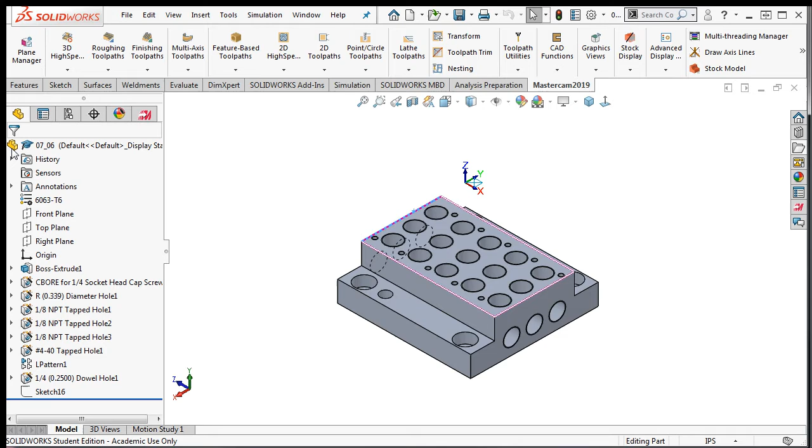Next, I'll select this edge on the top of the part. Scroll down and select propagate along tool plane and accept this selection. Because I'm using the one-pass cutting method, Mastercam will position the cutter center on the center of the face.

With the 2D toolpath facing window now open, I'll select the Tool tab. Like all toolpaths, I'll follow the same steps. So next I'll click the Select Library tool, then Filter. Because a face mill was the last tool I used, it will be the current active tool type.

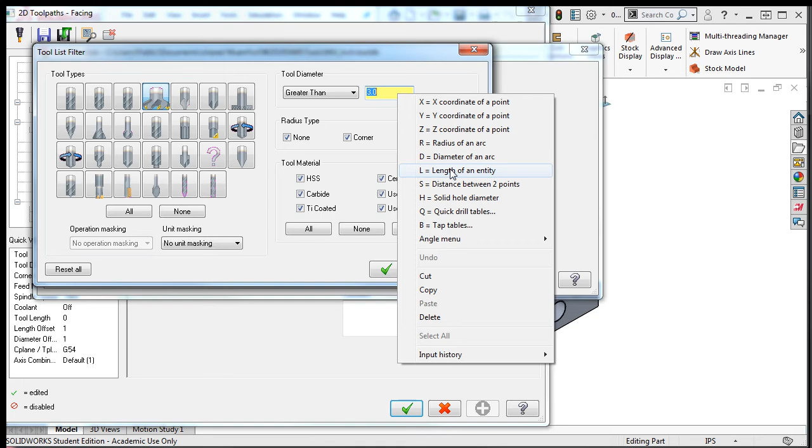However, I do not recall my part sizes, so in the tool diameter section, I'll choose the drop-down menu and select greater than. I'll right-click in the yellow field and select L equals the length of an entity. Now I'll select this bottom part edge, since the face mill must be greater in diameter than the line in order to machine this part in one pass.

And I can see that this part is 3 inches wide, so I know I'll need a face mill larger than 3 inches. I'll accept this search criteria and exit back to the search results. I can select the 4-inch cutter and accept this selection.

For this material with a carbide insert face mill, I'll set the cutting speed to 1100 feet per minute, the feed per tooth to 0.01, the plunge rate to 20 inches a minute. And then I'll add the comment in all capitals to machine the top surface.

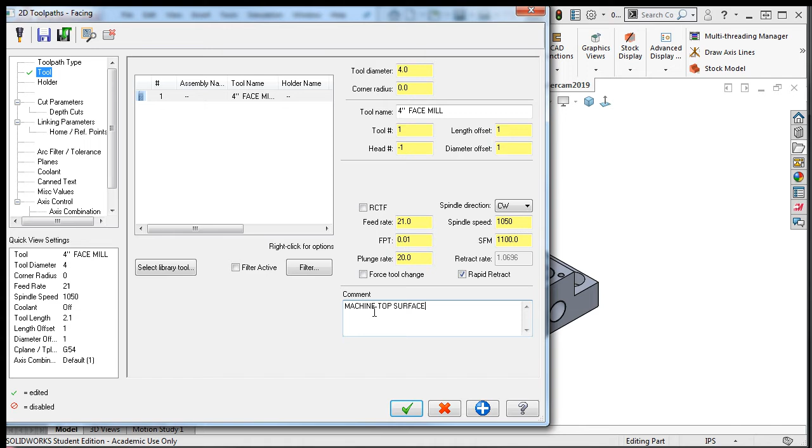Now that the tool parameters are set up, I'll select Cut Parameters and set the style to one pass. As you saw before, the graphic will update to show a reasonable representation of the toolpath. Since this is a single pass, the across overlap is grayed out, and I can set the other values as I normally would. I'll set the along overlap to 4.1 and the approach and exit distances to 2.1.

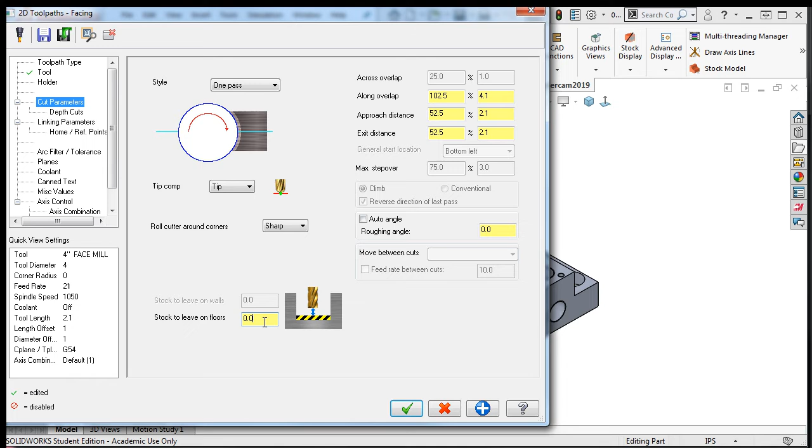Next, I'll set the stock to leave on floors to 0.0. Since this part only has 1/16 of an inch and there is only one to make, I'll remove all the material in 2 passes with this one cutter. I'll select the Depth Cuts tab, make certain that it's enabled, and I'll set the maximum rough step to 0.1, the number of finish passes to 1, and the finish depth to 0.02.

Next, I'll select the linking parameters. These default values are fine. The incremental depth of 0 tells the system that the tool depth of cut is equal to the Z level of the geometry I selected.

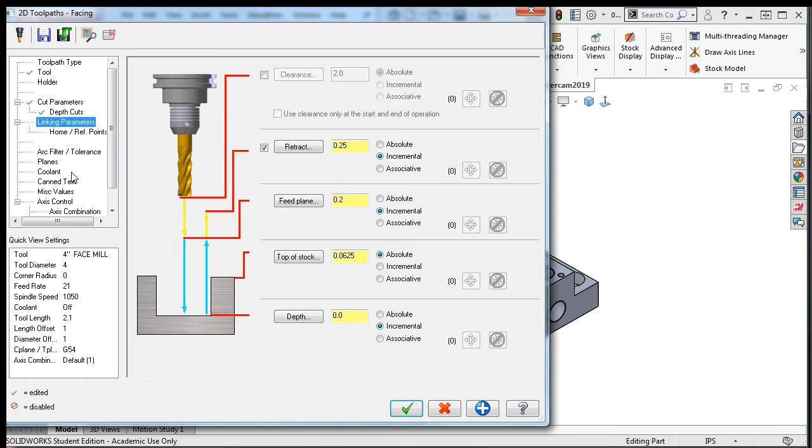The top of stock is 1/16 above the part 0. The feed plane will be 0.2 above the top of stock, or 0.2625 above Z0. The retract plane will be 0.25 above the top of stock, or 0.3125 above Z0. Now I can select the Coolant tab and enable the flood coolant and accept these selections.

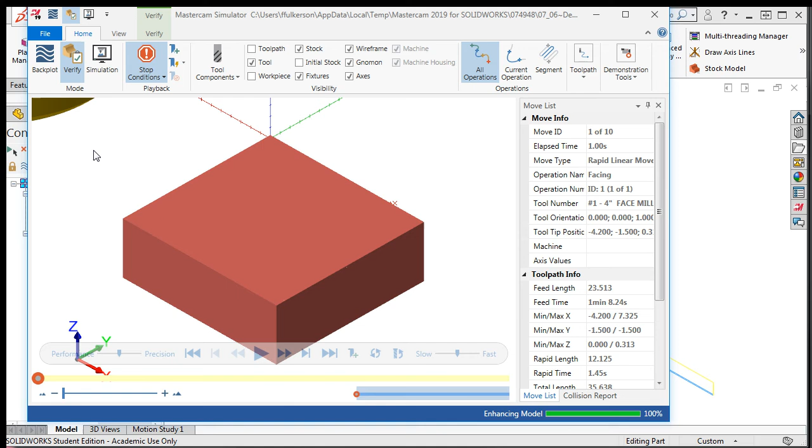Looking at the cut lines, I can see there are 2 passes. I'll select Verify and check that I'm happy with the toolpath. To visually ensure the tool does not feed down into the part, I'll right-click in the graphics area and select the front view. I'll select the step button here after I roll my middle mouse wheel to zoom out a bit until the cutter can be seen.

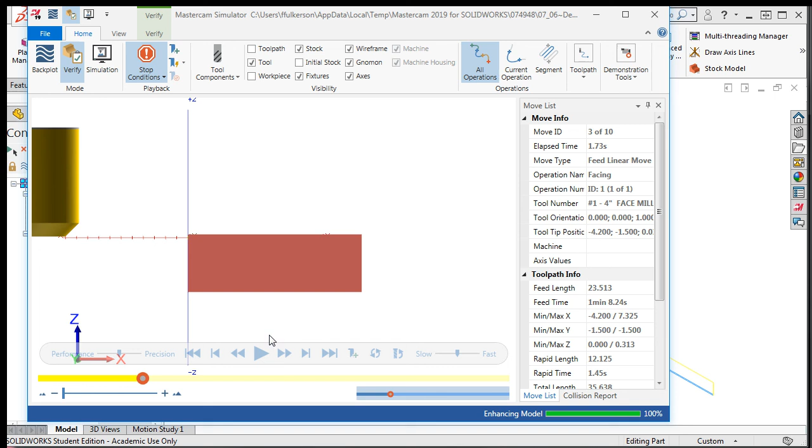Now I'll step the simulation so that I can see the cutter does feed down in air. I'll continue to press the step button to ensure that the tool movements are fine. At this point, I'll exit the simulator and save my work.